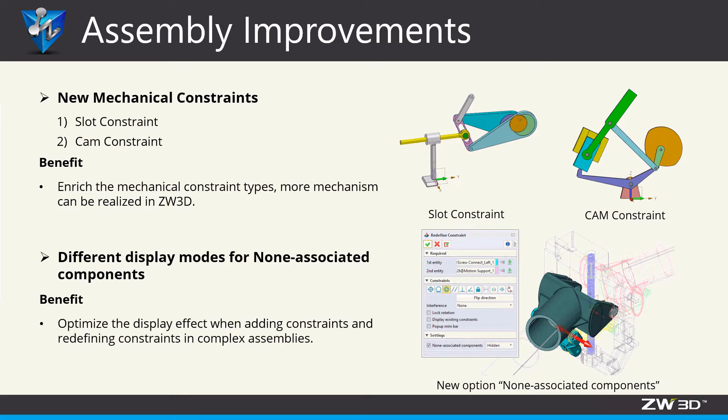Assembly improvement. In ZW3D 2022, the major improvements in assembly are as follows. First, there are two new mechanical constraints, slot constraint and cam constraint. Next, when adding and redefining constraints, users can select the display mode of irrelevant components. Last, ZW3D 2022 supports multiple column attributes and assembly folders.

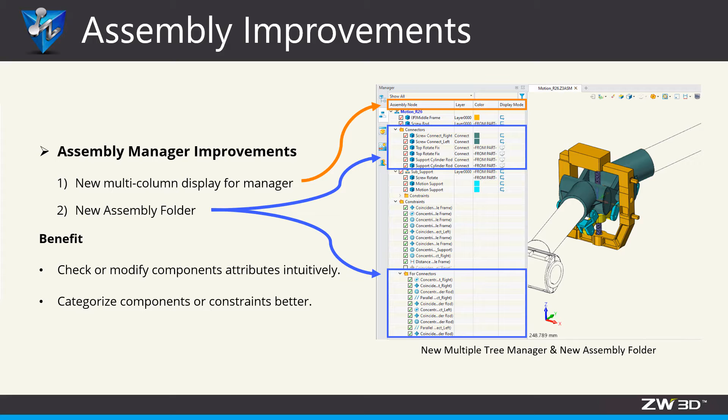Now, let's see the details one by one. Slot constraint. Let's see how this assembly can move now. The rod can be moved back and forth, and the handle can be turned around.

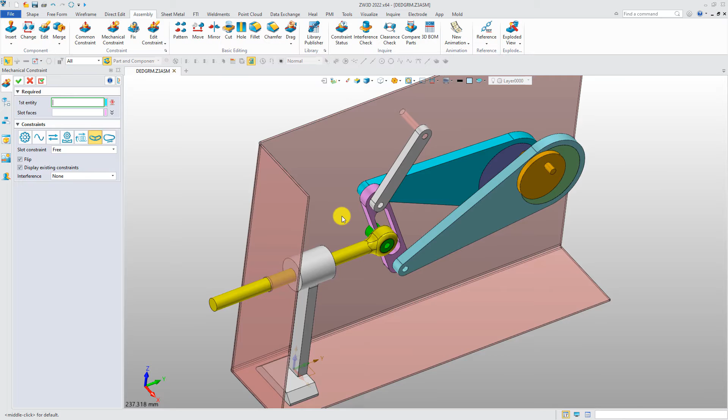Add the slot constraint. Pick the cylindrical surface and the slot surface. Click OK. Now, rotate the handle. The entire assembly is integrated together.

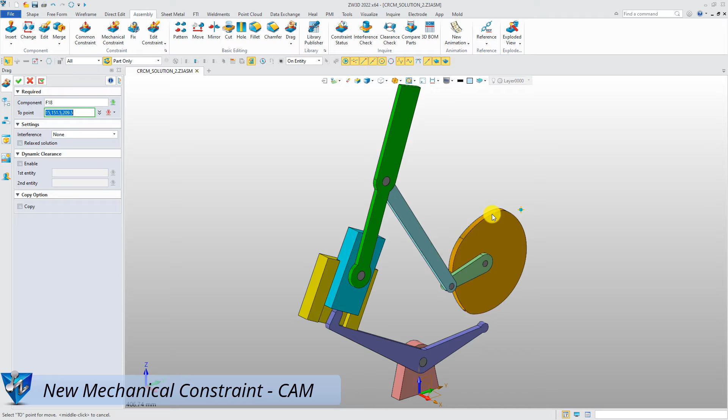Cam constraint. Similarly, let's see how the components move now. Add the cam constraint. Pick the cylindrical surface and cam surface. Now, the cam constraint comes into effect.

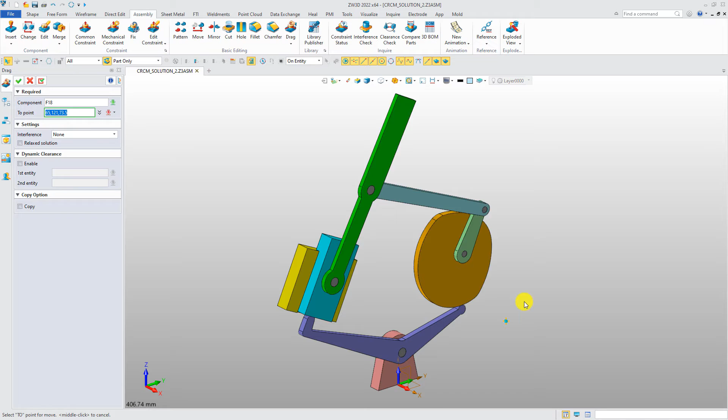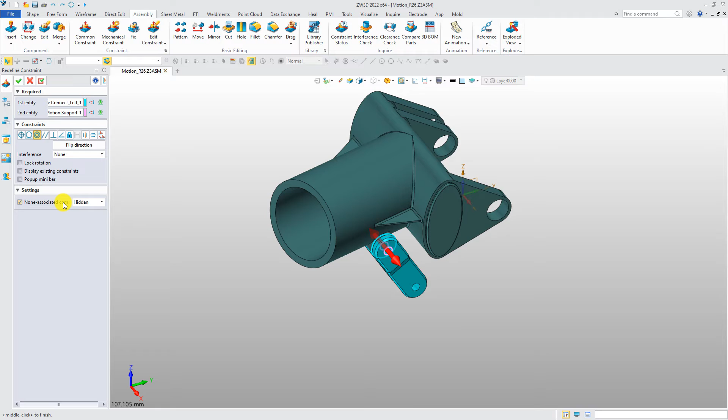Next is the new option, None-associated components. Redefine a constraint. Tick None-associated components options. The irrelevant components will be displayed in other ways, such as hidden.

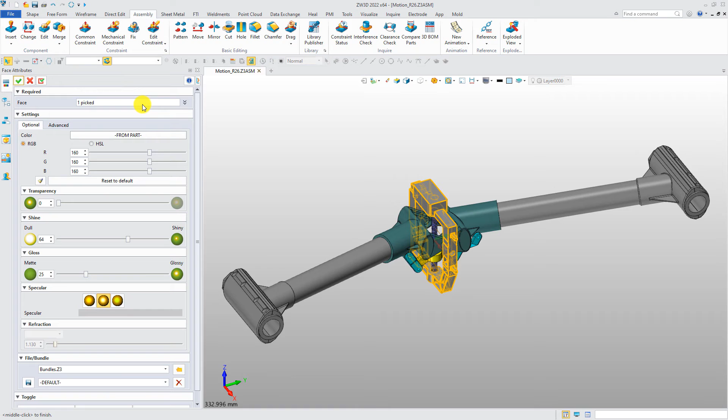New Multiple Tree Manager. Right-click History Manager and open Attributes Manager. Users can select which attributes of components display in the Assembly Manager. Users can view and modify these attributes more intuitively, such as color, display mode, etc.

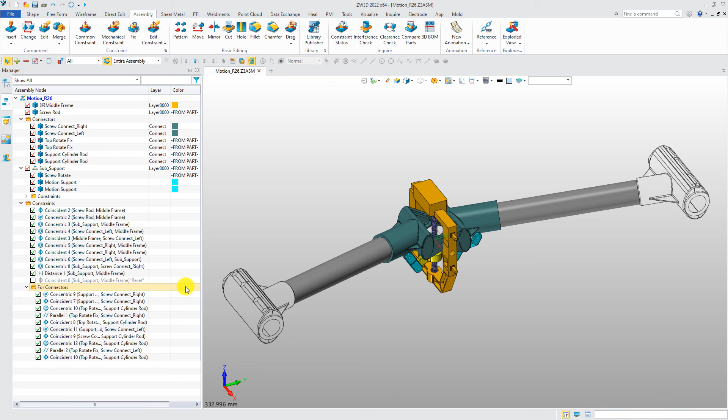Finally, there are the assembly folders, including component folders and constraint folders, which can help users better manage the assembly structure tree. With all these assembly improvements, users can do the assembly design more conveniently and efficiently.